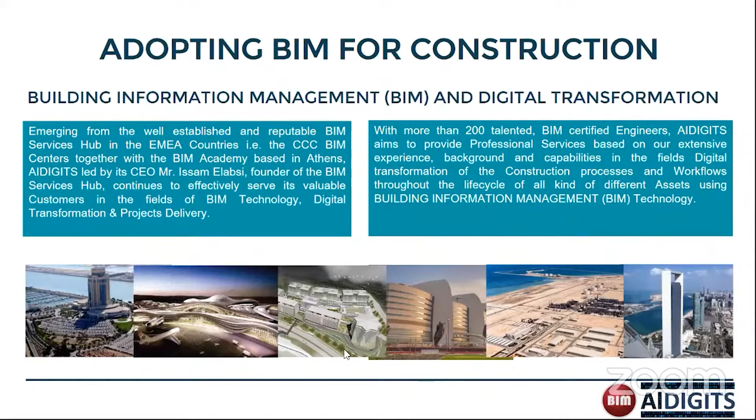We have been working in the field of BIM and digital transformation, especially for construction, for almost 24 years. As Ignacio said, I've been working in a mega construction company called CCC, which was ranked number 14 in one of the last 7 years. I established BIM in that organization since 1997. A couple of years ago, I established my own organization for BIM and digital construction. I'm the owner and I'm running AIDIGITS, plus 3-4 more companies for BIM and digital construction. I have a total of 200 engineers and almost 45 automation engineers.

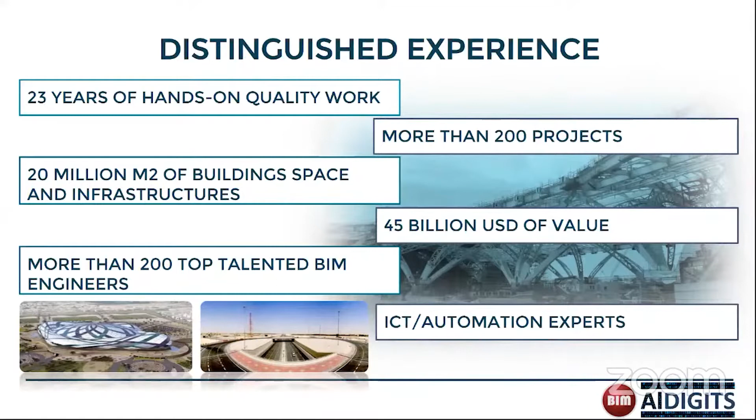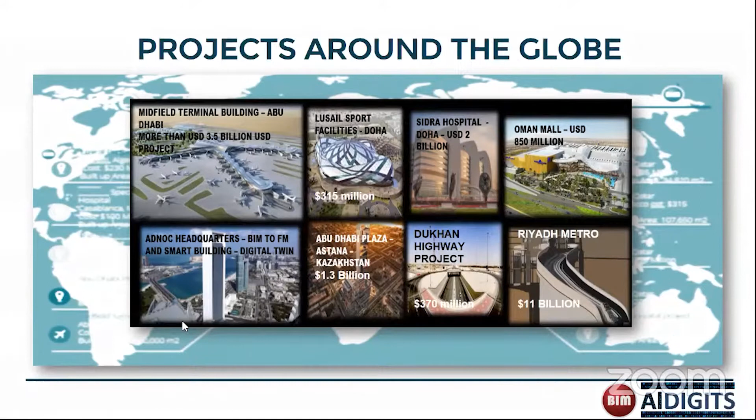We have done more than 200 projects worth $45 billion of value, and more than 20 million square meters of building space and infrastructure, and oil and gas. Part of our work was oil and gas, and we have diversification in the scope of what we do. We do civil infrastructure, buildings, and oil and gas projects. When I say infrastructure, I mean rail, roads, bridges, tunnels, highways, any kind of construction, no matter the size or complexity. Our work spans the full life cycle of facilities, from design through construction until handing over and beyond, going to facility management and operational maintenance.

After the presentations you have received from other presenters, the amazing knowledge and great similarities between civil projects and electromechanical projects when it comes to BIM and digital construction. So when we started BIM in CCC 23 years ago, we were inspired by the mechanical advancement in utilizing 3D applications for managing the design and procurement processes of mechanical projects.

And that's why we searched for a way where we can capitalize on 3D technologies and use it for civil construction. Since 1997, we've managed to find 3D solutions focused on buildings and later infrastructure. We then managed to develop a great portfolio of applications and workflows where BIM was utilized mainly for construction, because CCC is mainly a contractor, and also to manage the design process and the handing over process and beyond.

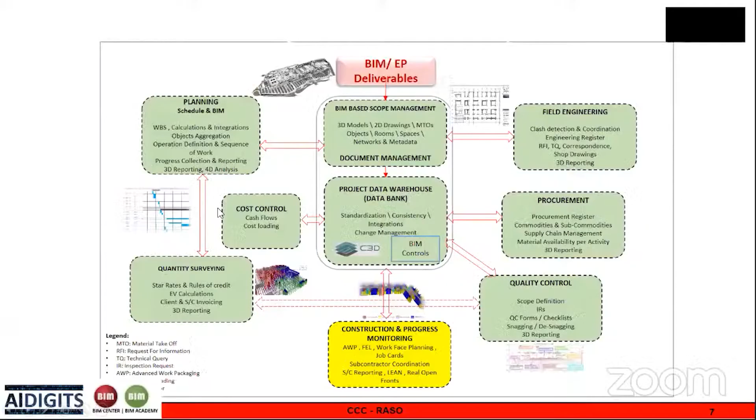This is our BIM-based project controls roadmap, where we integrate BIM processes with planning and scheduling workflows, where we use BIM for scope management, quantity surveying and scope management, including payment certificates and cost management. Also for cost control, to control cash flows and cost loading from one side, and on the other side, we use BIM for controlling material delivery, material management, and warehouse management, and also for controlling variations, finding clashes, creating RFIs, shop drawings, and reporting.

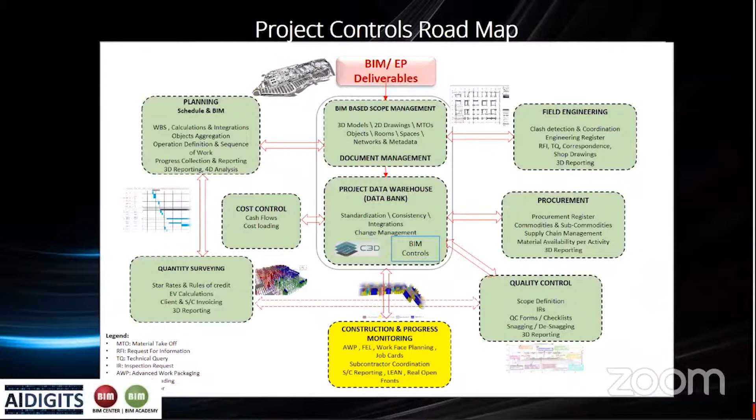A very important topic of BIM implementation was using BIM for procurement and material management, in addition to controlling the quality of the construction process and how we can integrate BIM or the 3D model of the oil and gas field with QC forms, checklists, snagging, and reporting in a 3D environment. Finally, how to control the progress of construction and apply advanced techniques of lean construction for controlling the process on site, such as advanced work packaging, work face planning, creating job cards, and subcontractor coordination and control.

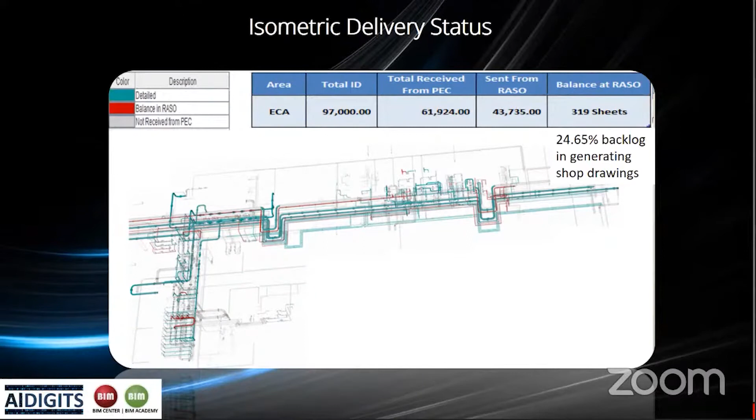This is an example of one of the projects where we control how to deliver isometrics to the site, and how we control to see what is delivered and what is not delivered on site. This is something we used to implement in civil projects to control material delivery and assign it to the work breakdown structure and to objects.

It's very important for the construction process to control the procurement and track the procurement steps. This is a color-coded extraction from a model, and not only an oil and gas model. In this BIM model, the blue color means the material arrived on site, the yellow color means it's manufactured, and the gray color means it's submitted to the client.

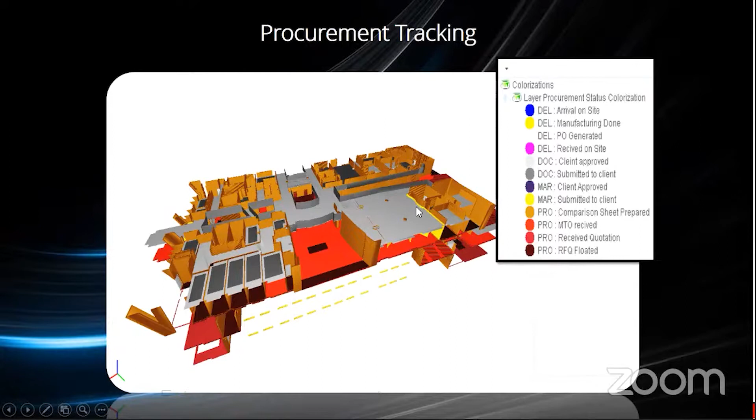So you can use this kind of color coding to investigate and test which item of your project was delivered or was delayed, and whether it has been approved or not.

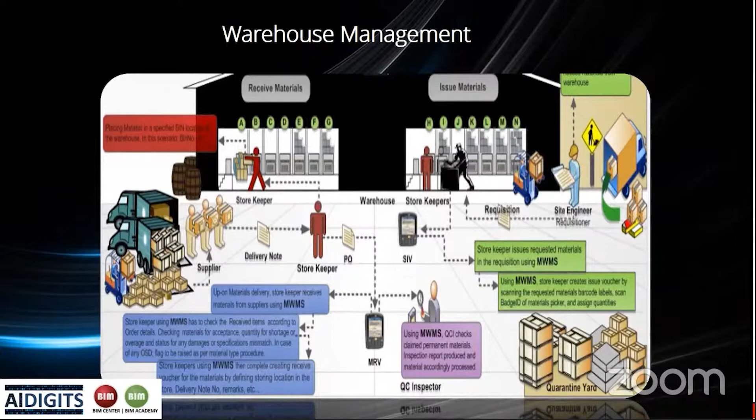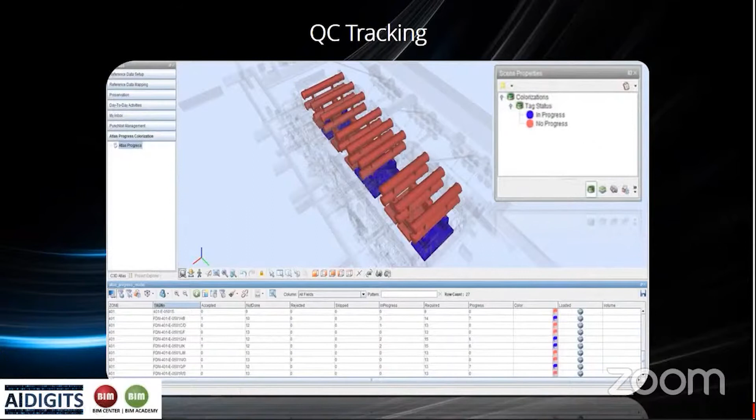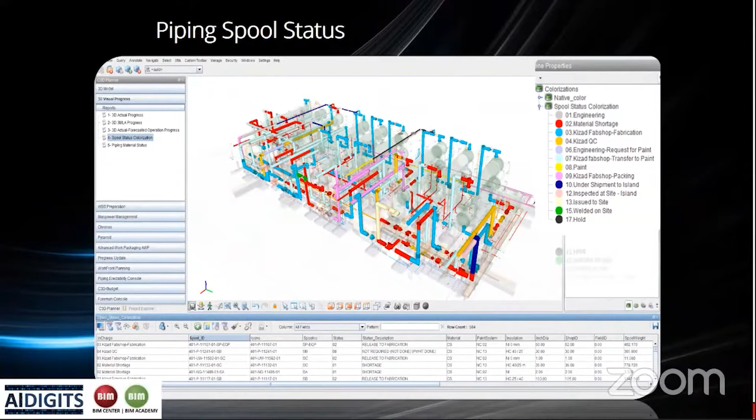This is another good example of utilizing BIM methodology for tracking the status of each component of the oil and gas facility, such as what has been engineered, what has been quality control certified, what has been approved, what has been inspected, what has been issued to site, what has been installed and welded, and what has been certified as approved by the client's quality control representative.

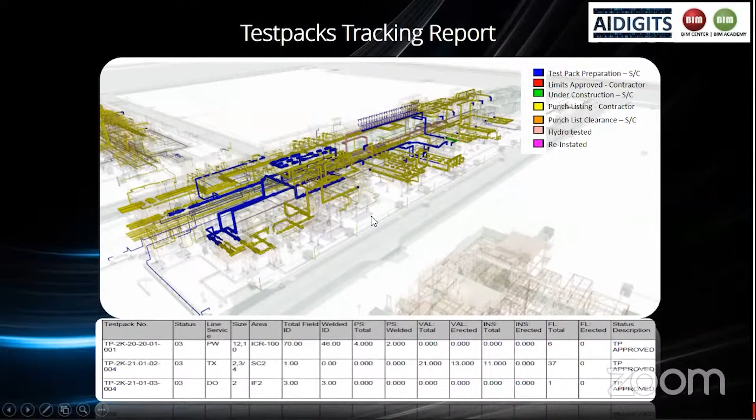And this is another example for those working in the oil and gas field, where you create test packs and track their status in the field. For example, if the test pack was prepared, if its limit was approved by the contractor, if it's under construction by the contractor or subcontractor, or if a punch list was generated with quality control issues—all of this can be traced from oil and gas models structured and framed with BIM workflows applied.

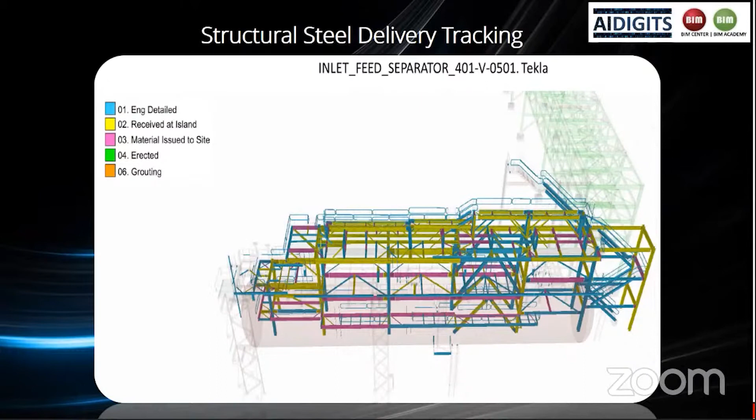This is also another example of how to utilize the same concept for the delivery of steel and to track the material of structural steel. As you know, structural steel is one of the most significant items in the construction of oil and gas plants.

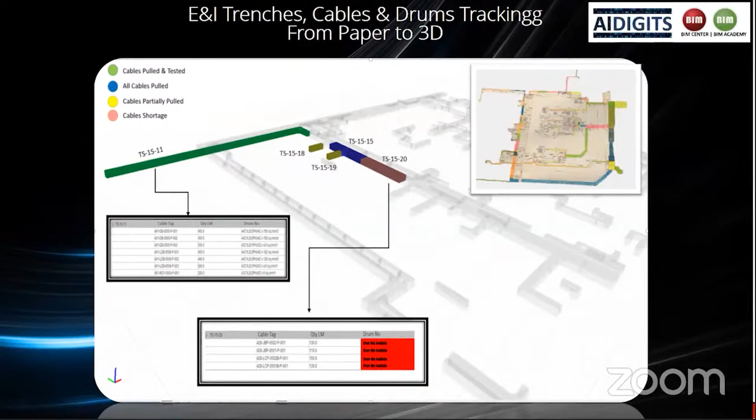We have also utilized 4D animation, integrating the BIM model with the construction schedule to visualize the plan and check the constructability of the schedule, making sure the client has a good view of the planning and productivity, and that his expectations are being managed and taken care of by the construction team.

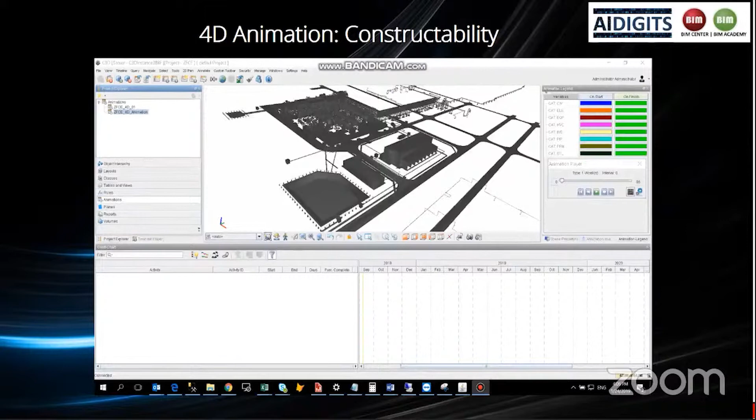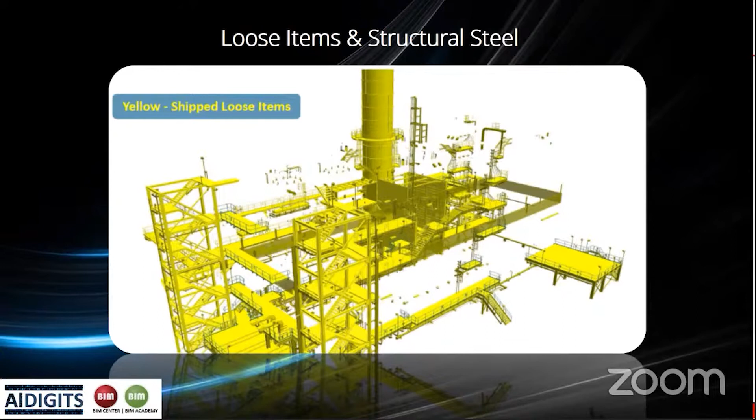This is also another example of how to utilize BIM models for controlling packages and contents, material components of each and every package, and ensuring the full and complete delivery of the assembly to the construction team, without losing or missing any component of the assembly.

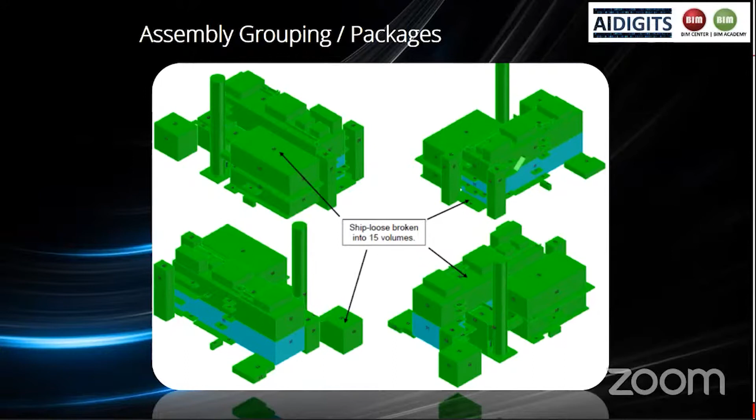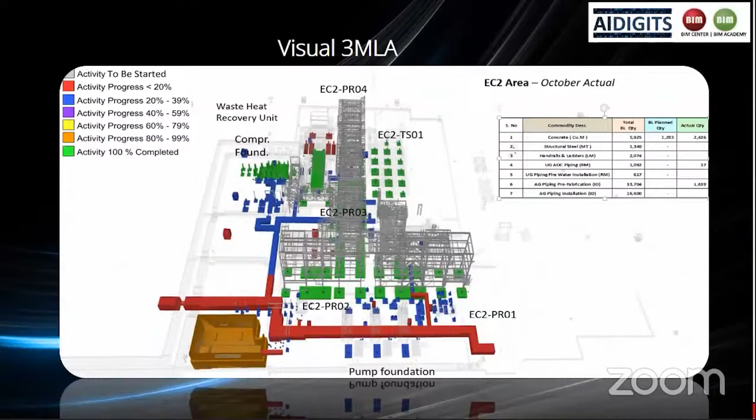This is a visual progress report that shows the progress of construction in the field, and each color code shows how much percentage of progress has been achieved. For example, green means it's 100% complete, yellow means it's between 60 and 79% construction completion on site. This is another example of a 3D progress report.

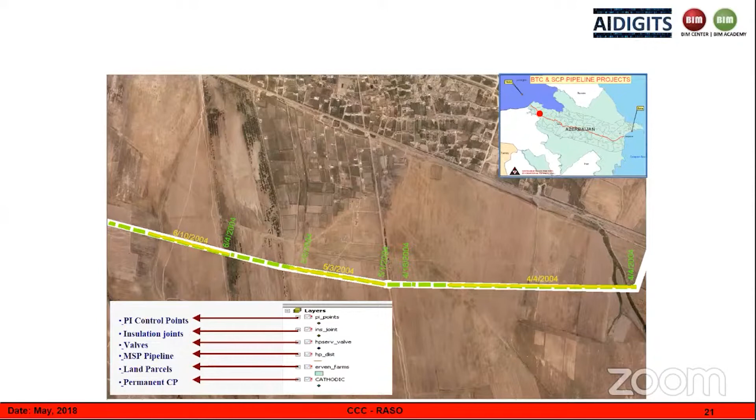At the end, I would like to highlight the integration between the BIM model and the geographic information system, and how you can integrate the pipelines and also the plant 3D model, the building information model, and extract information that is necessary for the geographic information system of the plant. Those are the different attributes that were extracted from the BIM model to the GIS shapefiles or the GIS database.

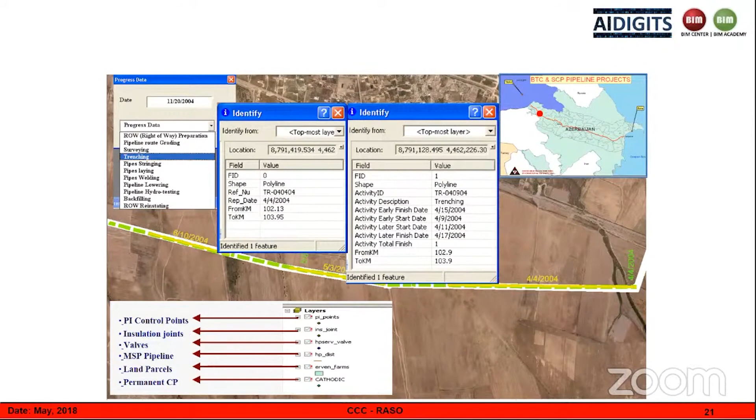As you know, we have been working on automating the integration between BIM and GIS, and we have managed to do this integration to a great extent, and there is a huge efficiency in the process of translating information and geometrical components from the plant models or the BIM models and GIS, and vice versa.

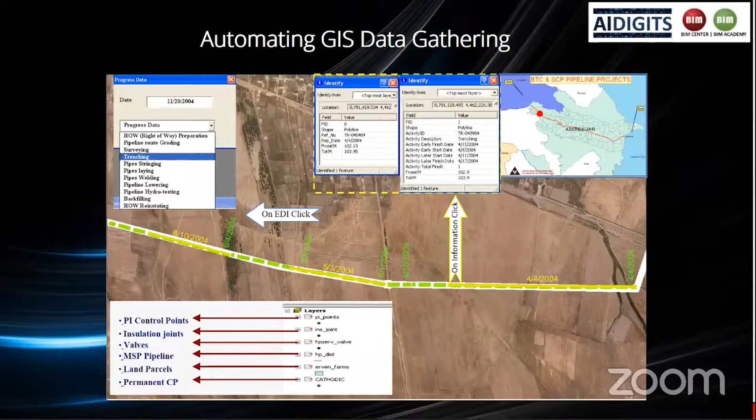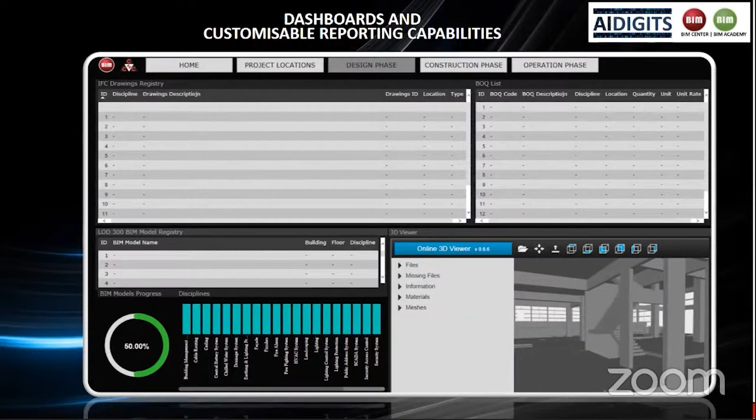Of course, we create dashboards for the client and the management of the project where they can witness the different reports about the construction site, about the different phases of the construction, from design phase, construction phase, and operation phase.

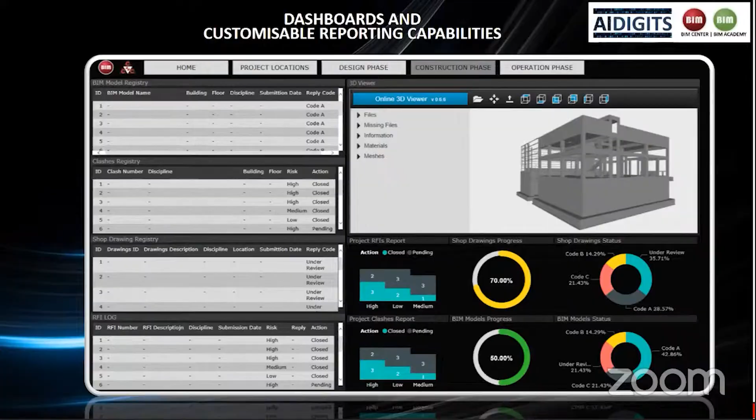Different dashboards show important information. This report is very important because it captures the different assets in the construction site, and also it shows for the operation phase the performance of each and every asset.

There is an integration also between each and every asset and the different sensors about this asset, and there is a layer of IoT, Internet of Things sensors, where you can collect the different performance indicators of each and every asset, such as temperature, energy consumption, heat, carbon emission. You can collect all this information from the different sensors in one platform, one IoT platform that we own, and we show the different performance indicators for each and every asset or system.

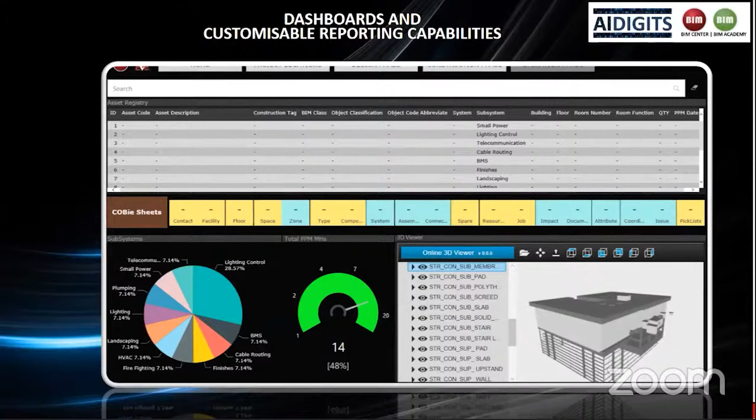Those are some examples of the dashboard where the assets of any plant or any construction are connected to a dashboard, or connected to a neutral IoT platform where all the different sensors are connected, and a lot of reports are generated showing the performance of the facility, the performance of each and every system, and the performance of assets. You can detect and calculate the cost of maintaining

each and every system and asset, because we have done a lot of integration between facility management solutions and our portfolio of applications, including BIM Center, and all the different systems and IoT platforms around the BIM platform.

The BIM platform reads all the information from the different assets, from the facility management application, from the operation and maintenance workflows, and creates a visual dashboard where the client can retrieve a tremendous amount of important reports, executive reports, that help him make the correct decisions about the performance and enhancing the performance of assets and facilities.

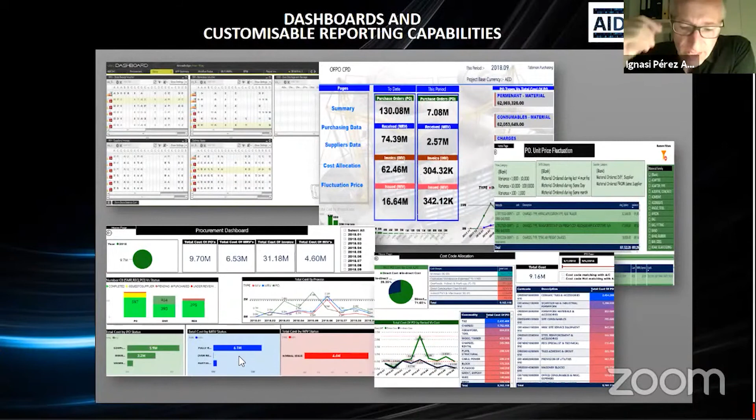Ignasi, the floor is yours. Thank you so much, Issam. I think it has been something amazing to see this kind of application of BIM in these kinds of projects. Well, I don't want to abuse of your generosity, Issam.

So I want to ask only one question. We have seen, for example, that you are using Tekla for the metallic structures of one plant. How many different software are you usually using in this kind of project?

Thank you so much, Ignasi.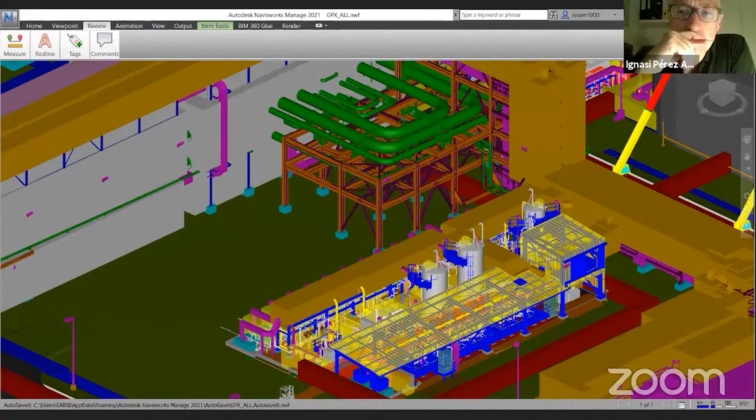In this kind of projects, we use a portfolio of solutions. For example, we use Tekla for steel detailing and concrete detailing. We use Revit or Bentley Open Building Designer for other infrastructure works like roads, highways, subsurface utilities, and other buildings. We use PDMS or PDS for the plant itself, and sometimes Open Building Designer or OpenPlant for creating the plant itself.

What you see in front of you is the recent project awarded to AIDIGITS, where we are the BIM consultant for an oil and gas project. This is a running project in the design phase now, and it's the biggest project in the world. I can't give many details because of confidentiality, but what I'm showing you is a real project where a huge plant has been given to us as BIM consultant to apply the same BIM workflows to the different components—the equipment, the vendor equipment, the structural steel, the electrical installation.

We are adopting this for the sake of creating a platform where the construction team can utilize advanced work packaging techniques and create daily tasks for the construction site. Using this, each and every foreman will understand what he has to do today, tomorrow, next week, and whether he has enough information, material, labor, and equipment to properly do the work without interruption.

This is real—of course I can't zoom out, it's huge. If you see the whole project, it is tremendous. This is the challenge for each one of these projects.

Exactly, the challenge is the size and complexity of the design models. There are around 30 different designers working on that, each with his own method of work, and interoperability is a big challenge here. Part of our work is to ensure that all these different designers and contractors work on the same level of information and that interoperability is achieved.

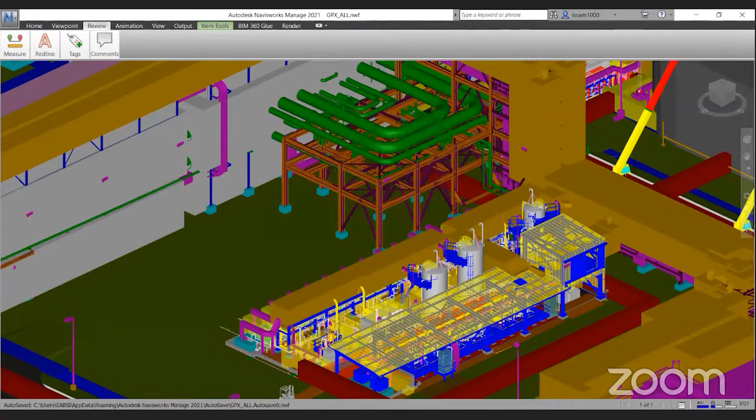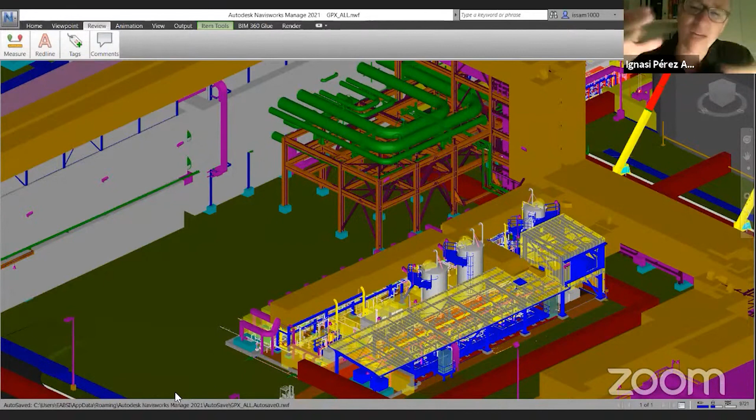Let me ask you the last question, and I'll stop here. We've been analyzing with Leonardo Mata in the session before yours how the BEP, the BIM execution plan, has to account for confidentiality of a project. How are you dealing with this in a contract, in a BEP, for this kind of project? This is a great question, Ignasi.

As you know, there is a huge debate about contractual obligations and IP rights for the design. So far the industry could not find the best solution for that. But for us—I can't say we found the best solution, but we found a solution.

The solution we found is that, during your work with any of the vendors or subcontractors, before they sign any subcontract agreement, you need to include all the clauses that ensure at least the minimum of what he needs to deliver and how he can protect himself, and how others should respect what he is doing. This should happen before you sign the contract with any subcontractor, so the BIM execution plan should be included in the contract. All the components of what he needs to do should be as clear as possible from day one.

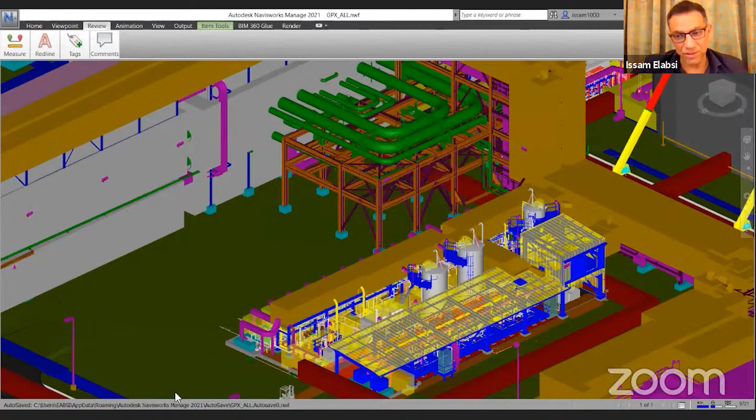The challenge is that you ask them to follow this, but after the contract is signed it's too late. So what we do is postpone the contract signature a bit. We sit with each and every vendor—we had 120 in one project. We sit with all 120 and develop what we call an EDI, electronic document interchange, that contains a BEP and all the contractual requirements of what he has to deliver for his discipline, and how we can ensure that he owns this information and how he can protect others' information.